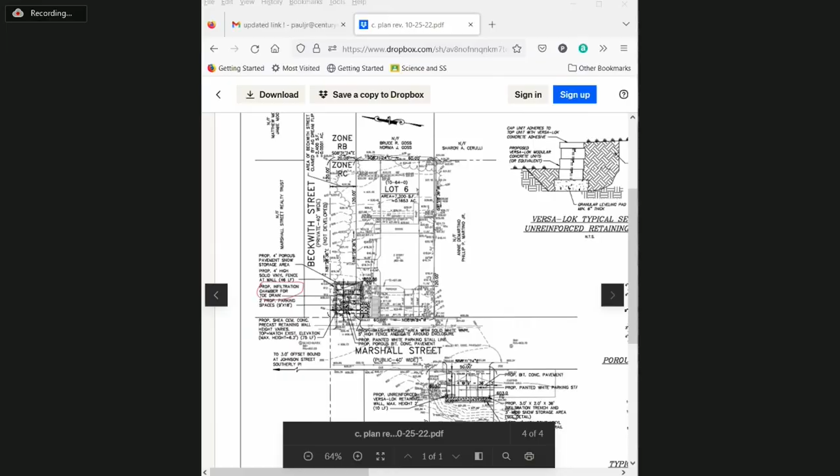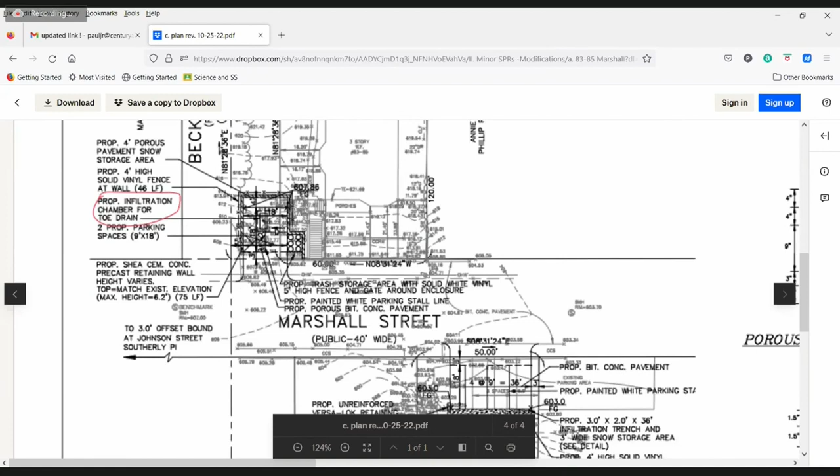These just arrived 2 hours ago. I sent them over to Nick for engineering and to O'Hara so he has them to post. Nick was concerned about where the water was going to flow, so he talked to the engineer, and the engineer came up with these plans. I haven't reviewed them 100%, but I know he said it should be all set with what Nick wanted. I'm not sure if Nick had a chance to review it. He's been very helpful, and he's given me many chances, and hopefully this can make this work. He's here somewhere, I think I saw him around. Did he? Oh, maybe he left. But anyway, I think he'll be on eventually if he's not here right now.

Can you zoom in a little bit? Yes, just a little bit. What do you want to see? The problem is it keeps getting cut off. From what I was able to tell when I received this, I think the only thing from the most previous version we saw Friday morning, Paul and Paula, was that circled on the left-hand side, proposed infiltration chamber for a toe drain. And I think that was at Nick Erickson's suggestion.

That is correct. In the area we're looking at right now is for 2 parking spaces, 18 foot width. That is correct, that's for 2. And then there's 4 on the opposite side of the street. Yep. So 2 spaces on 8385, and 4 spaces on 0 Marshall.

I would assume Nick's going to call in, he usually does, but I don't see him on there. You want to scroll down a hair to see the other 4.

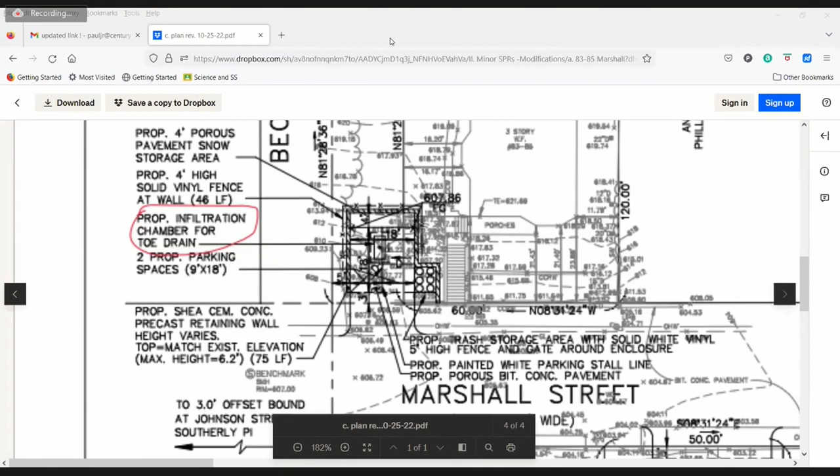Yeah, so pretty much after our meeting on Friday, I went to his office. We went over every note. The only thing that was concerning to him was trying to find out where the water accumulation on the 2 parking spots was going to go, because he didn't want it to go to the street, and we agree with that. So I put him in a 3-way with the engineer, and they went back and forth and figured out this infiltration system that's going to go in the middle of the parking lot of the 2 spots. It's going to be a pipe going around the entire parking lot, which is going to lead to the middle, and I think he has a sketch of what he has in mind on the print about midway on the right-hand side.

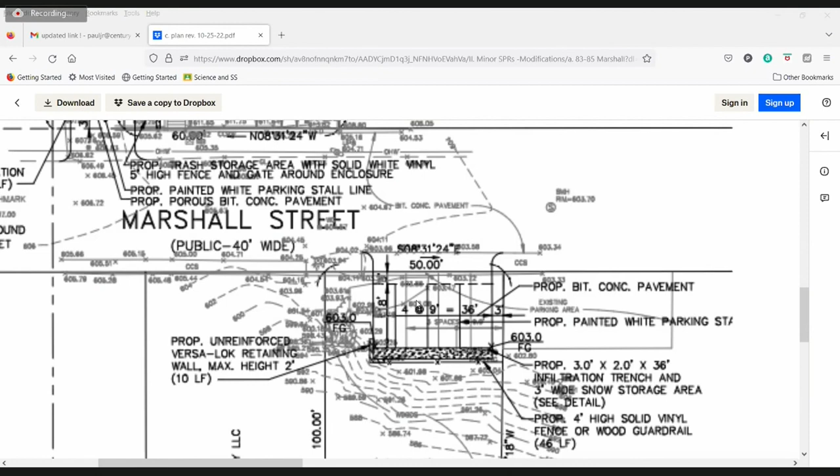Perfect. Well, since you met with him, it sounds like this has come a long way since we talked 6 months ago, or however long it was, with your partner there.

You've made leaps and bounds from before, so I very much appreciate it. Since Nick isn't on, and it sounds like you guys are in agreement, we can make it subject to final review from DPW, just to make sure his concerns are satisfied.

Let's look up the ZBA determination. Just bear with me one second, everything needs to be on the plan. I think this is the right one. Yep, this is the one you were talking about. Okay, so this was the ZBA decision.

They had some conditions in their continuance. You were saying you're going to them at some point after this, November 15th, I think our next meeting. One of their requirements was for us to have an okay on the planning before we move on. I just wanted to make sure these items were considered.

So we can go through that. One, trash spaces to be a line item on the plan, which we do see on the 83 to 85, you have it fenced in. Yep, correct, with vinyl fencing. Which is number 3, trash enclosed. Vinyl fencing, no chain link with slats and location shown on plan.

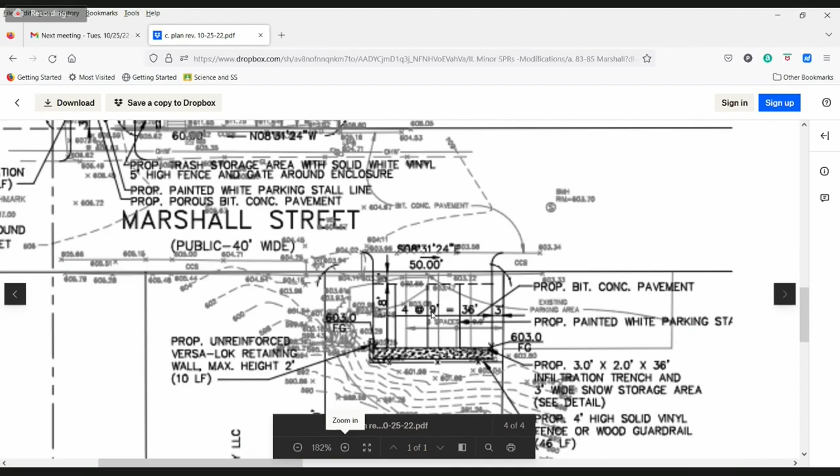You have it listed as vinyl or the wooden guardrail, you might do both. Correct. Submit a plan for Lot 6 for snow removal. Which one is Lot 6? Across the street, where the house is. Actually it's lot 69, I think, but I don't know why they're calling it lot 6.

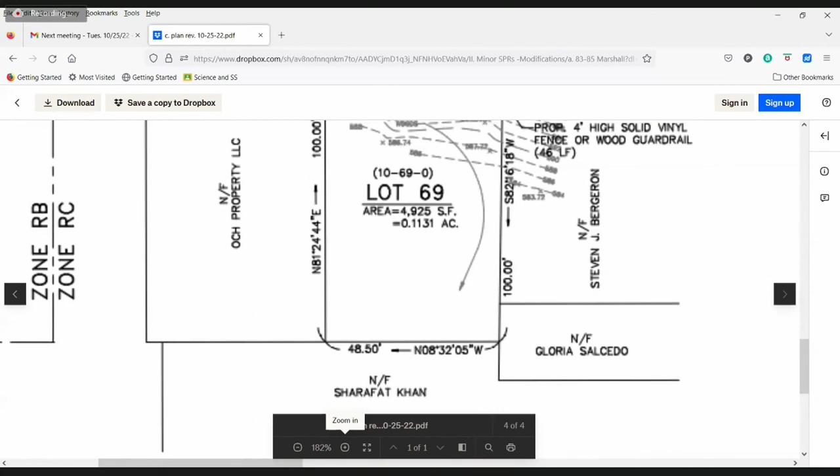And you have snow storage on there, and show the 6 spaces, it's supposed to be 83, 85, or whatever. Marked as emergency parking and garbage, Lot 6. So there is a total of 6 spaces between the two. Oh, that's supposed to say lot 69. So there's not going to be 6 spaces on Lot 69, there's 4, and then 2 across the street.

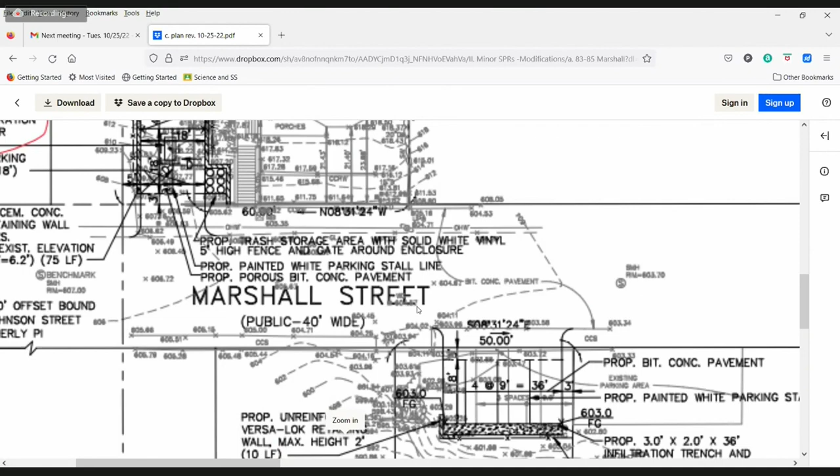I think it shows 1.5 per apartment, but it's okay to have an extra one. As long as there's no confusion, I don't know why the ZBA... obviously we'll approve this, hopefully that doesn't hold you up. You just tell the ZBA, this is what the planning board approved. Do any board members have any questions on this plan? No.

What was it, there is lot 6. They said lot 69 is this parking lot, and then lot 6, but what were they referring to? Oh, lot 6 is the house lot. Okay, thanks, Laura.

So, lot 6 for snow removal, and have lot 6 as emergency parking and garage. I guess you'll have to talk to the ZBA about that. I think we've worked with you enough on this, the planning board's comfortable. I'm comfortable with the plan the way you drew it up, and you'll have to discuss that with them, Nadal. You'll just have to know one of their conditions was show 6 spaces at 69 Marshall, which I think they meant lot 69 across the street. You don't have 6, you have 4. And then lot 6, which is the house lot, show it as emergency parking and garbage, which we're not necessarily doing, making 2 spaces there.

So you're just going to have to describe the situation to them. Yeah, I will. This was the approved plan, and hopefully they don't require you to change it. Yeah, I hope so as well.

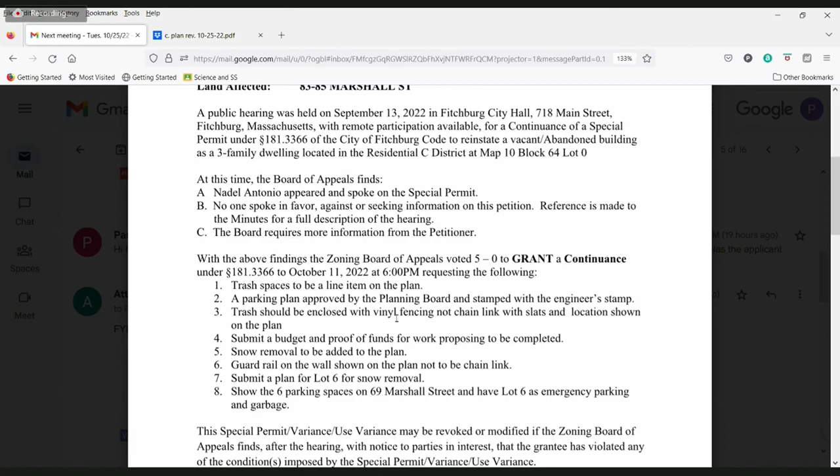All right, beautiful. Any further questions from any board members? Okay, is there any motion? I usually print out an agenda, and I don't have it, and there wasn't one in the Dropbox. This isn't a public hearing, right? No, correct, so I don't need to close it, it's just a minor site plan.

Okay, make a motion to approve 83, 85 Marshall Street, subject to the most recent plan dated October 25th, '22, with the caveat that it's subject to final review from DPW regarding drainage.

Second? Motion's made with a second. All those in favor say aye, all those opposed say opposed, and we'll take roll call. Alin? Aye. Laura? Aye. Alex? Aye. Paul? Aye. Paula? Aye. Amanda? Aye. Great.

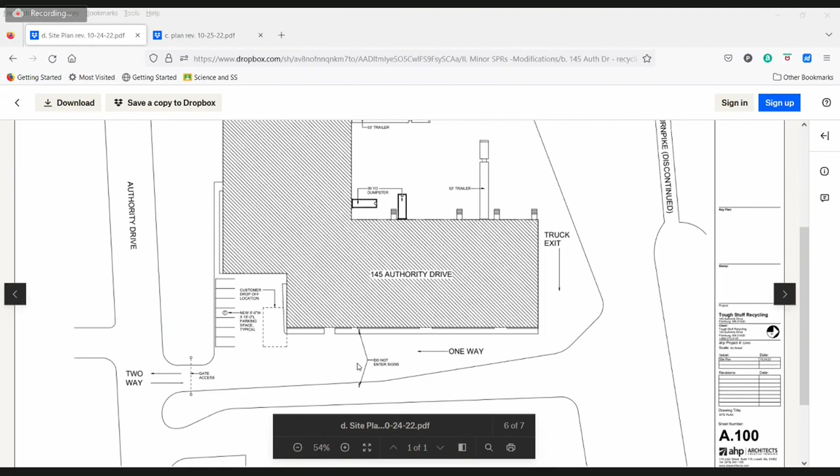We also have a customer drop-off zone. We've changed where our parking is, on the front versus on the east side versus the west side, to allow a little bit more parking area. Plus we've denoted the actual size of the parking — I believe it's 9 by 18, yep. So that was pretty much the extent of our plan.

In the notes, our security camera locations are to be determined. We're currently working with the PD and a private contractor right now to determine placement of that, and to hopefully minimize any illegal drop-offs at our property once everybody finds out who we are and what we do. Perfect, and I'm glad you put the gates on there too, for if and when you decide to do that, it's on the plan. We are deciding that — it's just, supply chain issues have hindered us, but everyone's having those issues these days, so.

For the general audience, do you want to explain the intent of the business? Oh yes, we are a mattress recycler is what we do. We came into Massachusetts because starting the first, mattresses are a landfill ban item along with some textiles and other things, and we came in to help the surge of mattresses that will no longer be able to be landfilled. That's pretty much our primary business. We take those, pull off all the recycled components, up to 75 to 85% of the mattress, and recycle those into second and third party items — that's the intent of our business here.

So it's only mattresses that you do, nothing else? Only mattresses here, yes, correct. We may expand further recycling operations here, but that's not in the plans currently. Currently it's just to take care of the major issue at hand, which is the mattresses.

And this is a little unique in that it may offer some of the residential drop-off at certain times. Yes, correct. Our business operating hours are from 7:30 in the morning till 3:30 in the afternoon, and the residential drop-off will be during those times — definitely not afterwards, but I'm sure we'll see that. But what we mostly do is work with municipalities in their current curbside collection. So most of the traffic we have in is truck traffic coming from aggregation points of municipalities, from trash collectors like waste management, and other large volume generators.

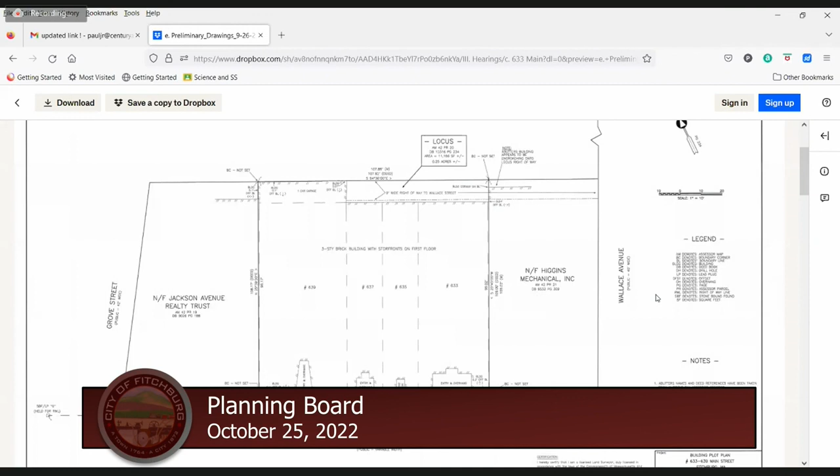So this is an existing 3-story building a couple blocks down the road. Right now the second and third floor are vacant, and the first floor is commercial - there's a dentist in there right now, and another tenant on the first floor. So the plans are to convert the second and third floor to residential apartments and maintain the commercial aspect on the first floor, with a mix of 14 two-bedroom and 2 one-bedroom units.

So that brings a total of? Total of 16. Right now the building has one means of egress off of those floors, and we'll be providing a second means towards the rear in the alleyway. There's a right-of-way to the rear of the building that we want to maintain for the second means of egress.

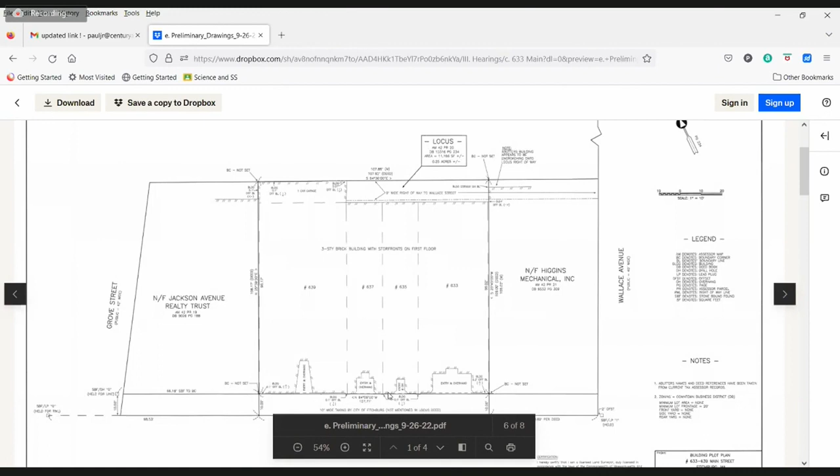And also trash collection - it does have a way out to the public road, so there'll be small wheeled dumpsters that will be rolled out to the road to be picked up for trash, won't be seen by the public, they'll be hidden. There was a comment made about that right-of-way area, because it's surrounded by buildings, wanting probably 2 security cameras back there. So we'll be providing whatever security is needed for the new tenants coming in, so they feel safe in that second means of egress.

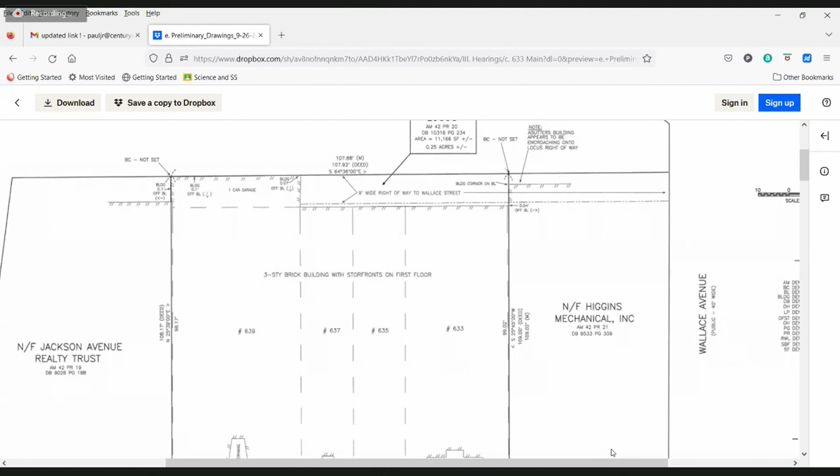The exterior of the building, the front along Main Street, we feel that it's adequate the way it is. It's been maintained over the years very well. Windows, everything's masonry. There might be a couple places that need to be patched here and there, but for the most part, it's in great shape.

The rear of the building also is in great shape, but we will be putting in new windows. The windows back there are ancient, so we'll have to replace them. Along the storefront, we're going to be painting the sign band above the windows and not changing out the storefront now. But over the years, as new tenants come in, we'll probably be changing out the storefront systems to something new.

What's the approximate size of the units? Of the residential units? The one-bedrooms are 600 square feet each, and the 2-bedrooms are 800 to 1,100 square feet. Half of the 2-bedrooms have 2 baths, nice open space.

And market rate at this point? Yes, market rate. And our understanding is there is an elevator shaft, but there's no elevator to be installed. We will not be using an elevator, that's correct.

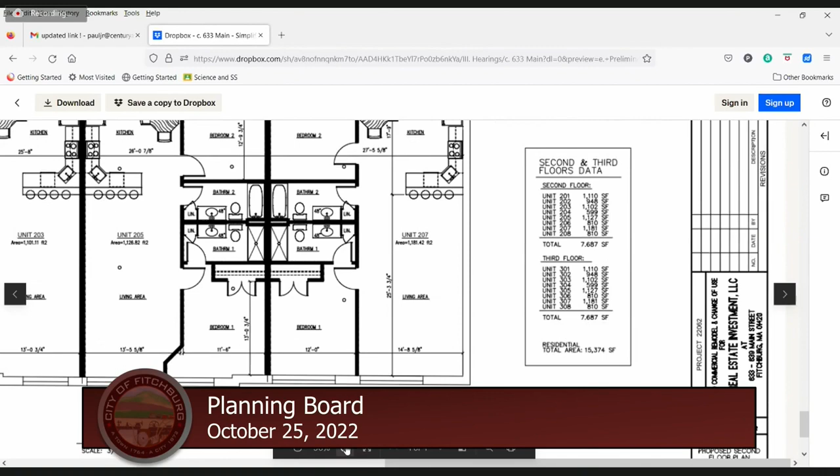On the floor plan, it shows the layout and the square footage of each unit. Yes, it's right here - lower right corner has that table. Those are all the sizes, Paul. So it's 15,000 square feet of residential units, give or take, and then those are the individual sizes. Correct.

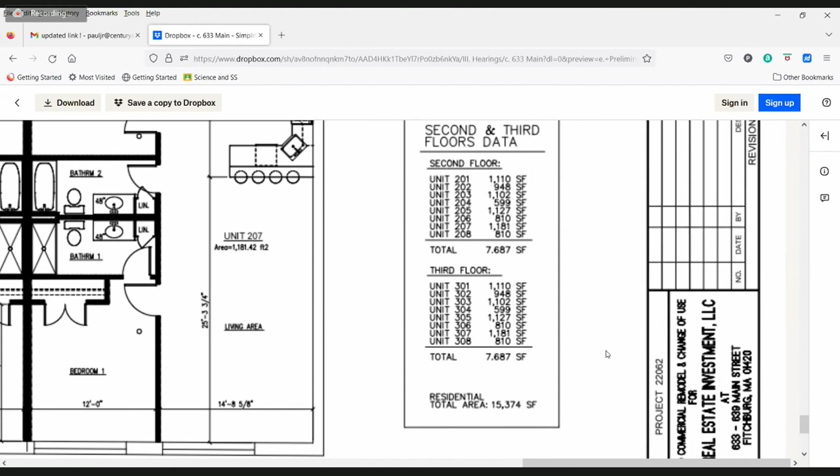Right, so at 2,500 per unit, that's 40,000.

The only other thing remaining is, we had talked about the rapid flashing beacon that the city's working on funding to install in front of the library as the crossing. We said the alternative is, if you don't want to get tied up in that installation itself, we would treat this like any other multifamily project - a $2,500 per unit contribution towards the fund, which we would then give to DPW to install that rapid flashing beacon.

Yeah, I believe that's the way we want to go, rather than the beacon installation. It makes it cleaner for you. I don't think that would cover it anyway, but either way, the city's got to pay for some portion of it.

Like I was telling Bill, this project in particular is going to be right where that's being installed. So it's perfect, especially if you use the parking garage. It's going to be a direct benefit for your tenants.

We can do it that way, and we'll just tell Commissioner Erickson that even if they pay for it now, we can reimburse the city or the DPW for those funds when and if occupancies get issued for these down the line.

Okay, Nick is on the meeting now, by the way. Perfect, Nick Erickson. I don't know if you're there, and you heard any of that conversation. Do you have any department comments? I'm here, can you hear me?

Yes, great. I've heard through community development that there's some extra money in the Main Street Boulder Drive two-way conversion project to fund that RRFB installation out in front of the library. So I'm hopeful that we can take advantage of that and get it done using those funds instead of having to make the applicant pay for this.

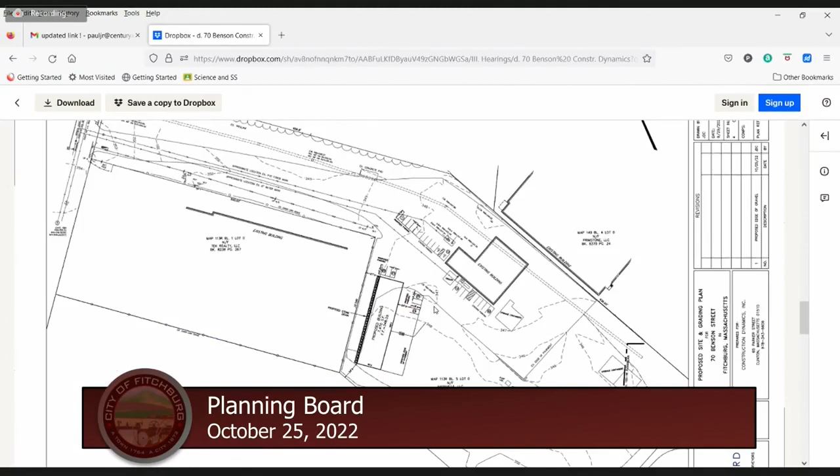So one of the comments that were made was about access around the building. Yes, so we revised the plan so that we have gravel access around the northwest side, coming all the way around. On the north side, it's already paved. It's going to be paved on the south and on the east, and we'll have gravel access around the west side. Is the width satisfactory to the fire department? It will be. That wasn't even a comment from the fire department with respect to the existing site plan we submitted, but with that gravel access going all the way around, I'm sure it's going to be fine.

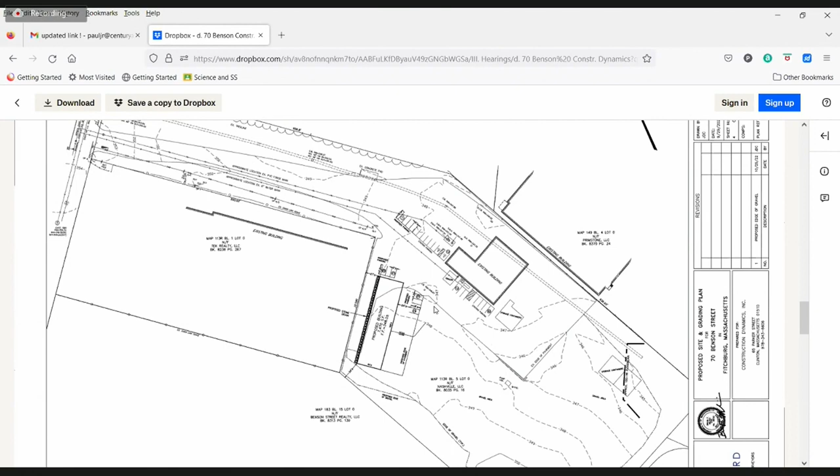We're fine with the conditional approval stating that the fire department must give its blessing for the access around the building. We're also seeking approval this evening so that Construction Dynamics can actually start the foundation in the good weather and get this project going.

And with that said, landscaping was brought up at the Friday morning meeting, and I would propose a condition that a landscape plan be submitted to the planning board for approval and the landscaping be completed prior to the occupancy permit being issued.

Another comment Friday morning was about a dumpster. There are 2 dumpsters on site already. If we need a third one, I'm sure we can come back and agree to a placement of the dumpster with the planning board. But there are 2 dumpsters on the northeast side already.

Clearly not visible from the road. And the abutting property is all industrial. In fact, this whole area is industrialized. And the landscaping, as you mentioned, would be mostly along the frontage.

Yeah, just the frontage, the existing landscape island. Whitman and Bingham, Haley Ward could have certainly thrown some bushes, shrubs, and trees on the plan, but I think what we're going to do is have either Andrew Leonard or Brandon Bro, two landscape architects we work with, come up with a plan that makes sense and submit that to the board for approval. That's what we would prefer to do. I think that's great, above and beyond.

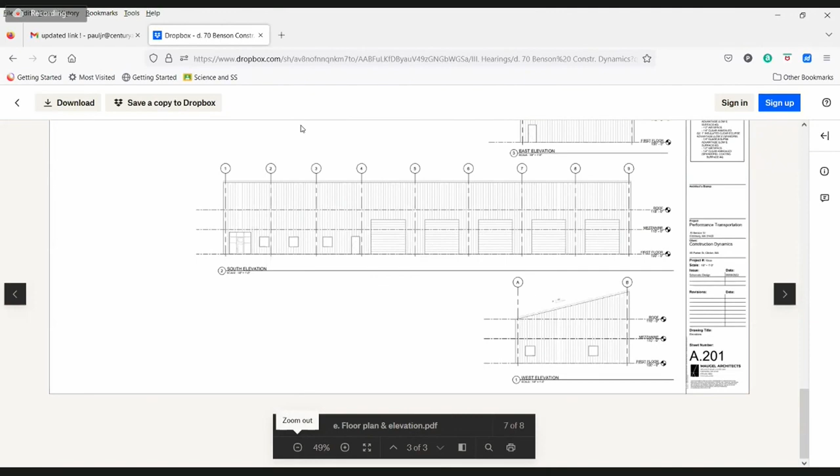That said, a conditional approval - any comments submitted by the DPW Engineering Department, we would like an opportunity to take care of those with them and give a copy of the revised plan to the board as well.

I know Jeff Hillman at DPW took a look at the plans today. He's on call as well, as is Nick.

If there's anyone from DPW who'd like to comment on this site plan before us this evening, Nick or Jeff, if you guys want to say anything.

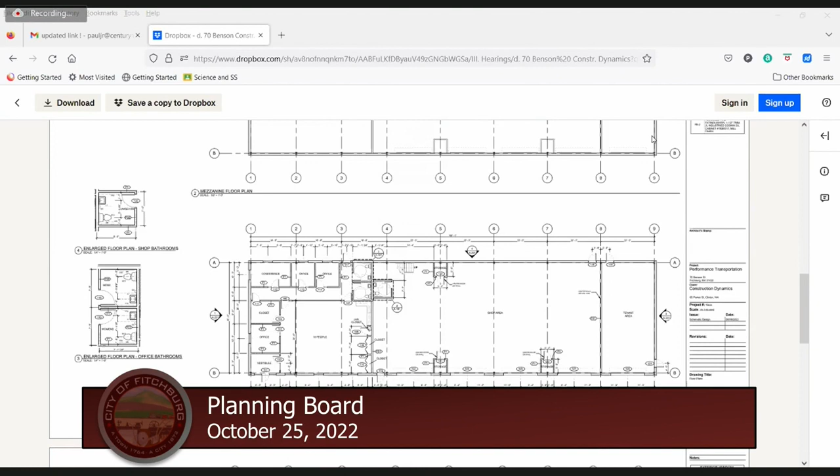The only other thing Jeff had during his review was the utility trenches, just making sure we've got the 12-inch cutbacks on either side. And I wanted to add the typical statements about utility permitting - any new water sewer connections need water sewer connection permits, and work done within the right-of-way needs to be done by a bonded contractor.

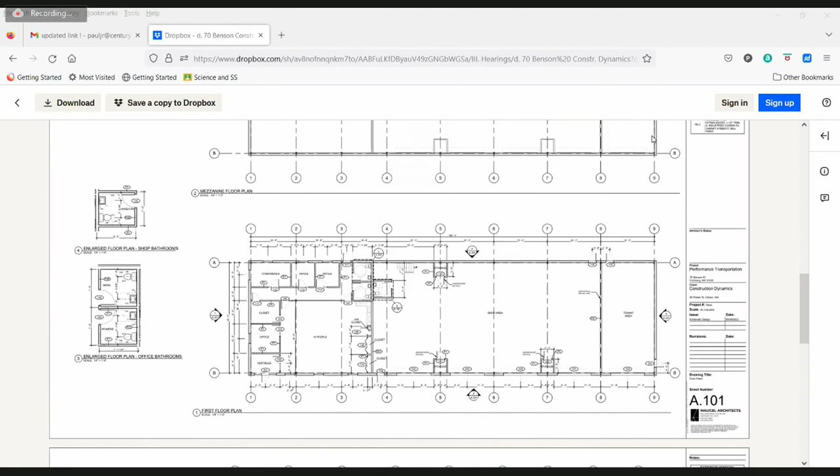All acceptable, pretty standard. Thank you, Jamie. Thank you, Nick.

This is a public hearing. Is there anybody else in the audience who would like to speak on this matter? This is a site plan for Construction Dynamics for a new 7,470 square foot light manufacturing building on Benson Street.

I had no one virtual. Mike, do we have any further comments from any departments? Just police said no objection.

Make a motion to close the public hearing. A motion's been made to close the hearing, with a second. All those in favor say aye. Aye. All those opposed?

I'll make a motion to approve the site plan for Construction Dynamics, a 7,470 square foot light manufacturing office building at 70 Benson Street, subject to satisfaction of Fitchburg Fire Department review of access around the building, landscape plan to be submitted and work completed before issuance of the occupancy permit as suggested by the applicant, and coordination with DPW regarding utility trenches, permitting, water and sewer connections, and working within the public way.

Second. Motion's been made with the second. All those in favor say aye. All those opposed say oppose, and we'll take a roll call.

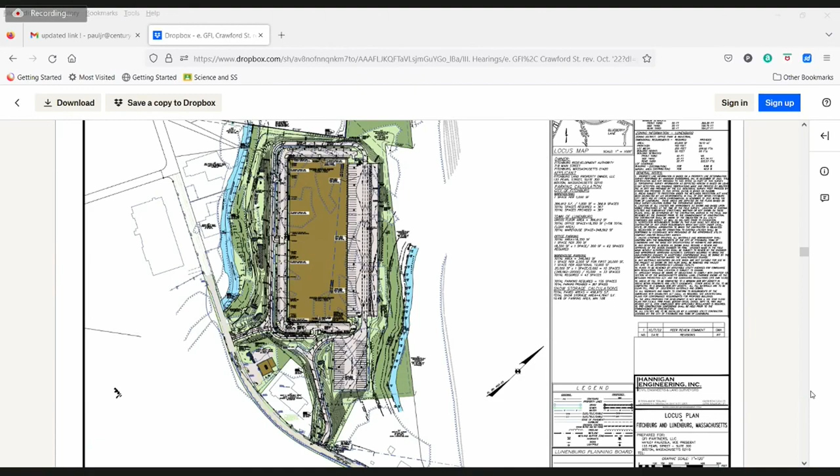Great, again Chris Anderson with Hannigan Engineering. Do you mind going to the next slide? This one? Okay, yeah, this one is fine.

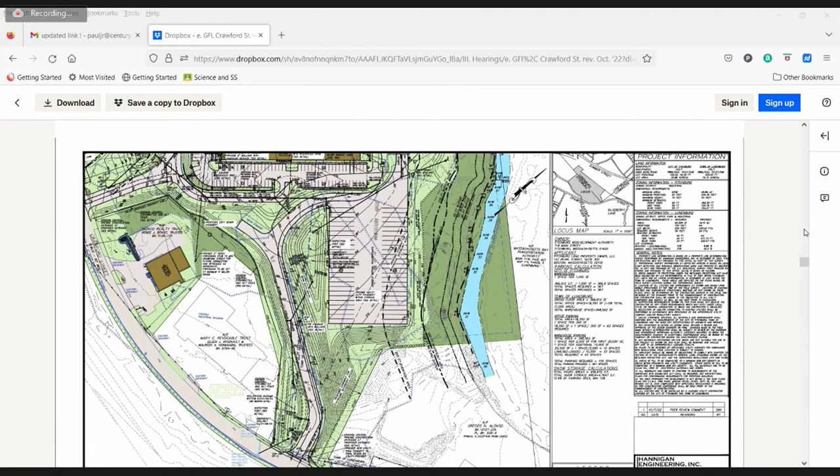So on this plan sheet, you see the truck entranceway along the easterly side of the property, as Haley just mentioned. This will be located exclusively for truck drivers and access to the rear loading areas. It'll be 30 feet wide for the traveled width. At the entranceway, there will be effectively a 3-lane driveway, 1 entry lane with 2 exit lanes, one making a left-hand turn, one doing a right-hand turn, to make sure a queue doesn't generate significantly on the property itself. There's a small infiltration basin near this entryway, which I'll go over in much more detail in a moment.

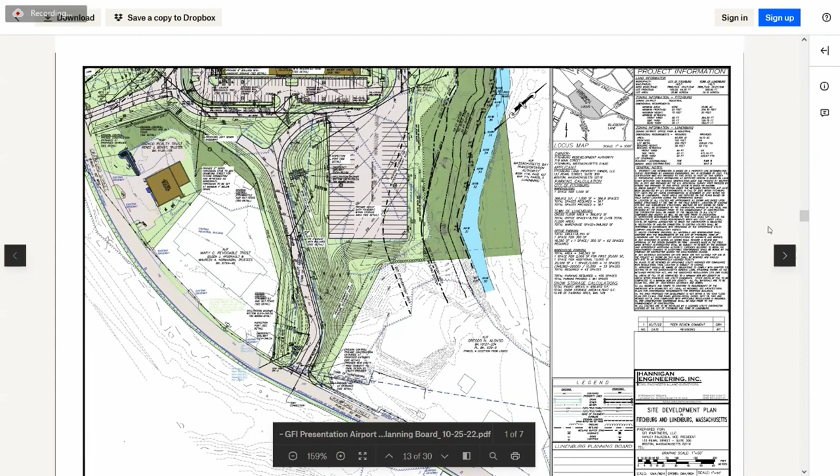Along the left-hand side of the page, we have the realigned employee entrance for the development. We shifted this driveway approximately 100 feet further to the south to allow for greater offset from the Nashua River, providing compliance with comments from the Conservation Commission, as well as to enhance the sightline profiles in this area.

This driveway will extend into the property and tie into an outer loop road that encompasses the entire property, providing access to the employee parking areas and creating a secondary ring around the outer perimeter of the building. It will also serve as emergency access to the truck loading area, or as an exit if something happens on the main truck road.

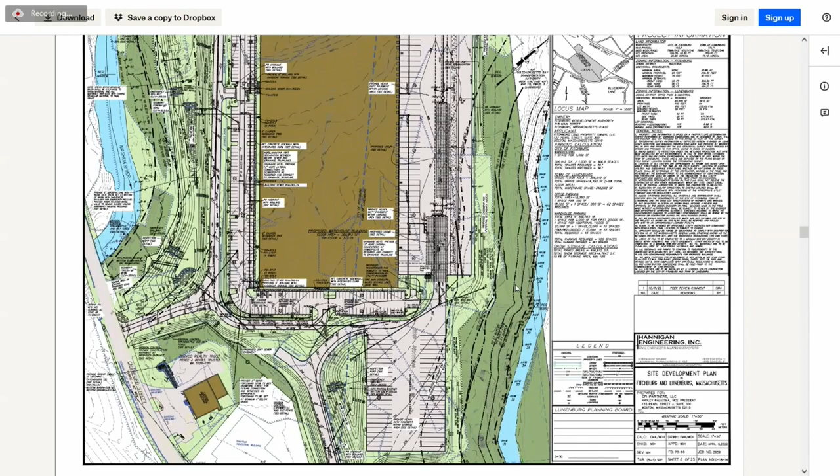If you go to the next page, we're traveling further north into the property, and the loop road configures a giant loop, tying back into the backside of the loading dock area.

As for utilities, we intend to tie into the municipal sewer and water system within Crawford and Airport Road. We'll provide fire sprinkler connections as well as domestic connections. This fire loop will encompass the entire building and provide access to several fire hydrants spaced throughout the property for fire suppression aiding capabilities.

Sewer will extend north into an existing sewer trunk line running through the abutting property, with the connection made within the City of Fitchburg's sewer easement. The property currently contains an old siphon sewer line, a unique way of transporting sewer water uphill—effectively moving a lot of water through a small pipe. That's a broad term for the hydraulic calculations, but that's what it is.

Due to the hypersensitive hydraulic nature of that line, we're proposing to extend our connection further upstream of that pipe in order to maintain flow and minimize impact on that line.

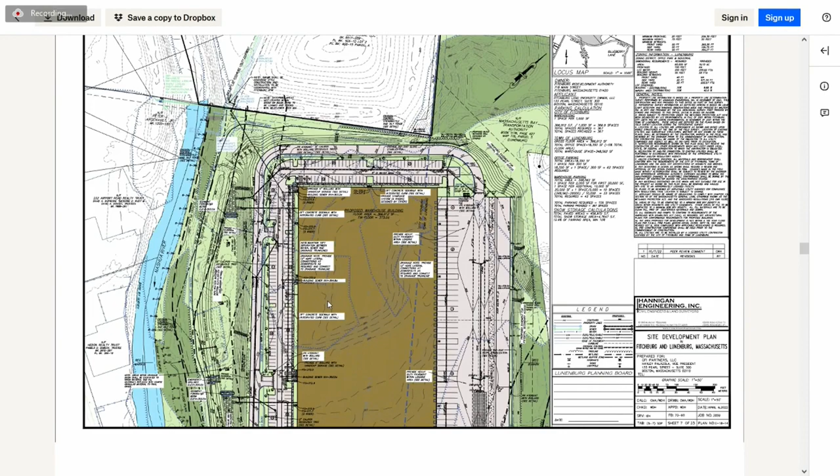Chris, I believe Hannigan responded to the stormwater review. Yes, there were a number of comments about revising or incorporating items into the O&M.

Yes, there were a couple comments relative to including additional measures within the stormwater basins, emergency relief valves, more inspection ports, stuff like that, so we've incorporated those into the plan. In addition, there was concern that we should also include some of the proprietary stormwater management features we're using for water quality treatment into the O&M plan, which have also been incorporated.

So are there any issues outside of the comments that were made for incorporating them? I don't foresee any comments coming from what they brought up.

Okay, those were DPW comments, or were those Tighe & Bond? Not DPW, those were Tighe & Bond. Okay, Tighe & Bond. And then the applicant responded to those comments.

I just want to make sure that we don't have any hiccups or anything. I'll just say subject to satisfaction of the Tighe & Bond comments. Yes. And there's no comments that you took issue with, right?

There was one comment relative to mitigation and calculations we've utilized in the past with the city and this board.

So let me say this, because I won't probably understand what you're going to say. With satisfaction of mitigation of the Tighe & Bond comments, the one issue you have, I would say, to be verified with the DPW to their satisfaction. Because as long as our DPW is satisfied, then I have no issue with it, especially when it comes to stormwater, water sewer connections. All of that is neither here nor there for.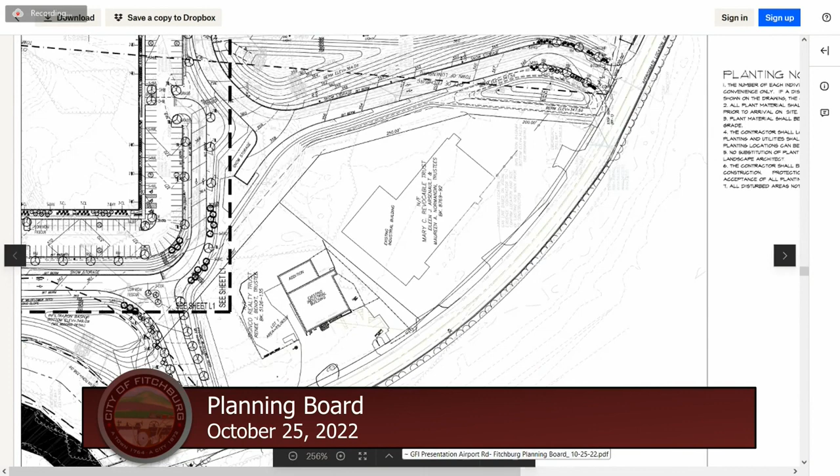I'll add that if there are further questions on the landscaping plans that we can't answer, which we probably can, I can get my landscape architect to provide a memo if needed. He tried to use native plantings on the site, and there's a planting schedule. It totals approximately 100 deciduous and evergreen trees being planted, and just under 400 different shrubs and grasses along the property. That was filed in addition to Chris's plan set, so I apologize for any confusion.

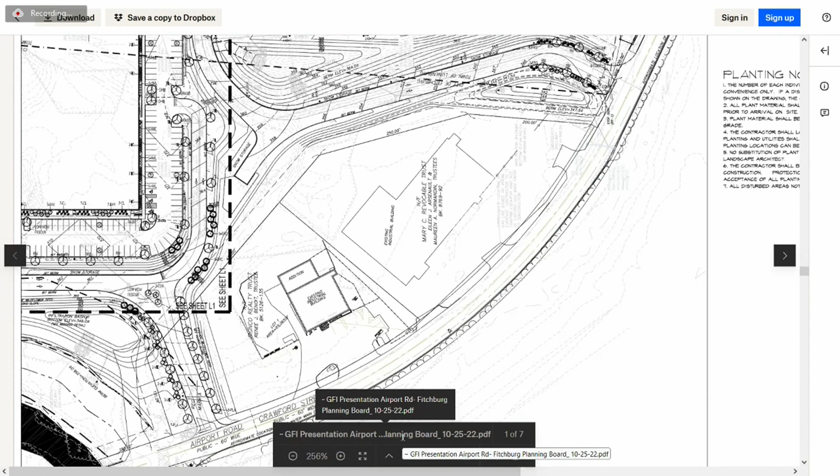It's also making sure that nothing impedes sight distance when you're getting to the actual entrances, so they're lower enough at that location.

Signage - is that established on the entranceways you'll have? At this point, not yet. When it does, we'll make sure it complies with the zoning ordinance. Once you determine the sign location, just show it on the plan and resubmit it. I know it's a last minute thing, especially since it will probably be determined by who the tenant ends up being, so we can see where it's going to be on the site plan. Before you install it, give us an elevation drawing so we know what it looks like, how big and wide it is - proposed marquee.

This is probably just a general question, but trash - I'm sure with a warehouse this size you have a plan for that. Is it all interior? There are several exterior dumpsters in the truck loading area. That will be enclosed with a vinyl fence, so it's not viewed by whoever drives through the site, and the site is extensively located far away from the right-of-way with significant elevation relief.

Just out of curiosity, are they shown on the plan? Yeah, oh yeah, right here - there's an enclosed dumpster on both pad sides, typical of these kinds of uses. There'll also be a dumpster somewhere inside the building for boxes and other stuff.

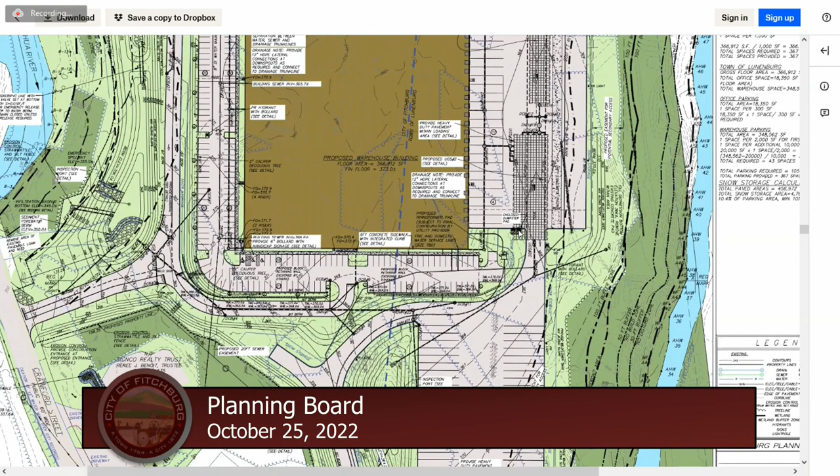Can you describe any energy controls, savings, solar, or anything planned for the building? Sure, I can speak to that. We construct all of our buildings to be solar ready, and before construction we'll look at the feasibility of installing solar. We have solar on multiple buildings in our portfolio, so that's always something we consider. We use air source heat pumps in the office space to reduce greenhouse gas emissions, along with LED lighting fixtures throughout. We have a couple of projects under MEPA's jurisdiction right now, working with DOER on some of them, and we've implemented these things in our projects and will continue to do so.

Exterior lighting, I'm sure, is probably proposed all the way around the building. Yeah, there was a photometric plan submitted during the original submittal process, and the general intent has remained the same - night compliant light fixtures, no light shine beyond the property lines, and adequate lighting in or around the site to make sure people get around the property safely. A formal lighting plan will be developed prior to construction when the actual units are ultimately determined. And with 61 bays idling, any policy on that?

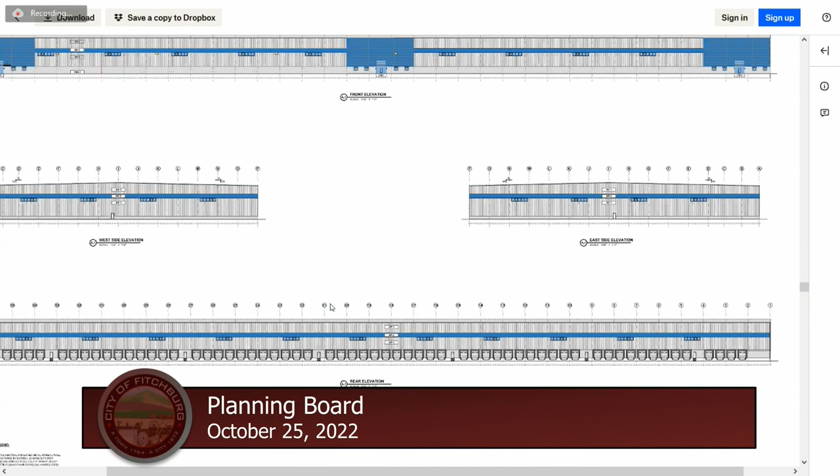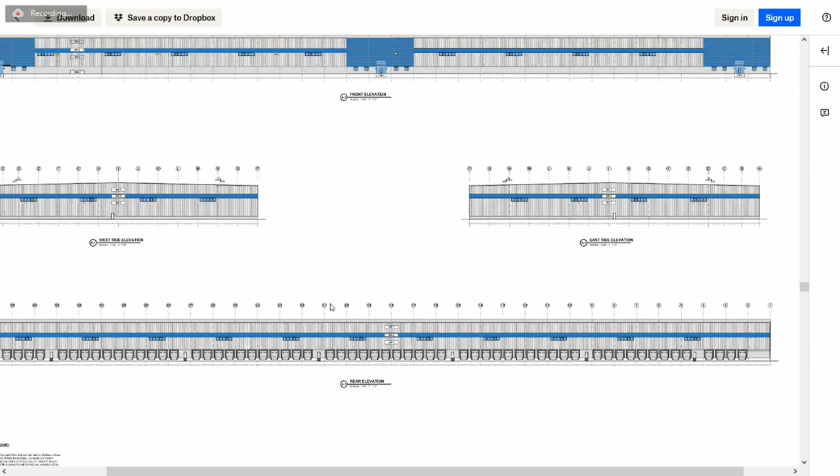What's that? Red and gray would be fantastic. Red and gray, Fitchburg colors? All right, I'll throw it in there. Halfway around the building on the Lunenburg side, you know? No, you wouldn't have to. Let them see the red and gray. I said you're really getting too consistent, so he threw some blue panels on the entranceways. That was his way of changing it up. So we can look at that.

It's not a condition. If it's something you want to do, great. I would just say, as long as it's not all one color. Got it, you just want to break it up visually. Understood, yes, just not a monolith.

And then there's a floor plan in there too, which shows 3 proposed office spaces. As I mentioned, in case this was subdivided, we could accommodate multiple users. The bay spacing is approximately 50 feet by 56 feet wide, with a speed bay on the end there at the end of the loading docks. This is pretty typical for Class A warehouse users. So you can continue on.

As I mentioned, Vanasse, our traffic engineer, is on the phone, Andy Arsenault, and will be presenting a couple of slides regarding traffic. We know that's an important topic we didn't cover at the last meeting. Since then, we filed a full transportation impact assessment to the city of Fitchburg, sent a copy to the town of Lunenburg, and performed an additional study for the city of Leominster to satisfy their concerns about traffic going through Leominster. So Andy, I'll turn it over to you if you're ready. Sure.

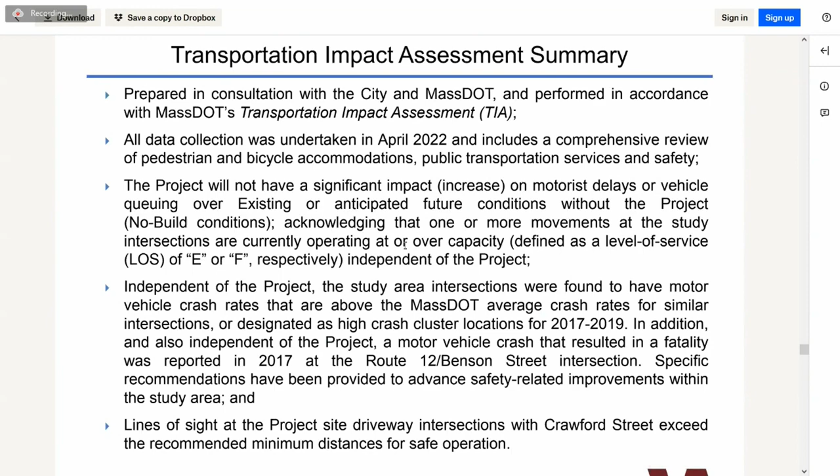Based on our review of the available crash records from the state, we did find some high crash locations, for which we've suggested some improvements that I'll get into in a moment. And lastly, the lines of sight at the site driveways exceed the recommended distances for safe operations. Next slide, please.

As far as the project specifically, we used data compiled by the Institute of Transportation Engineers, which is the industry standard, to estimate the traffic volumes for the project. This data is based on real-world studies of similar land uses across the U.S. In short, the project is expected to generate around 620 total trips over the course of a typical weekday.

I don't want to go too far down on the technical end, but the project itself is expected to generate around 620 trips over a typical weekday, with around 70 trips during the weekday morning and evening commuter rush hours.

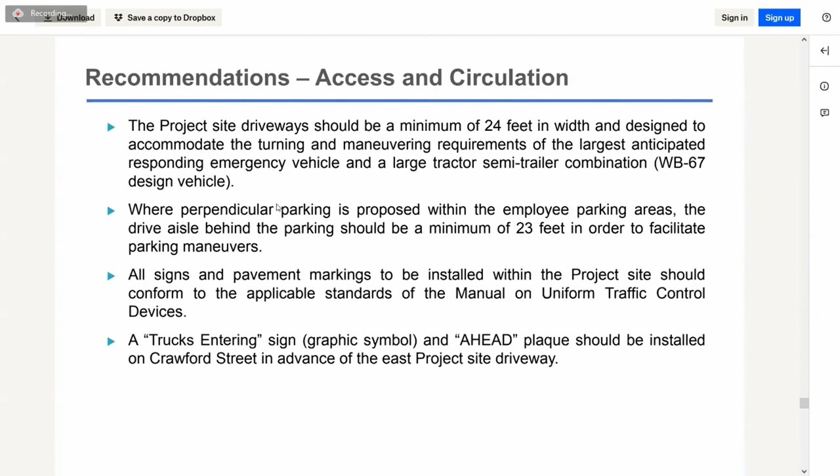We've also looked into breaking down the split between the passenger cars and the trucks, which is about a 2-to-1 split over the course of the day. Does that include both truck traffic and employee vehicles? The 620, yes, it includes both. I think it was around 400 employee or passenger cars, and then diesel trucks around 200.

After performing that technical analysis, we came to our findings and our recommendations. This first one is an abbreviated list of the recommendations we included in our study, and they have generally all been reflected on the site plans. These are all fairly typical of these types of projects, and they just aim to ensure that safe and efficient operations can be provided in and around the site.

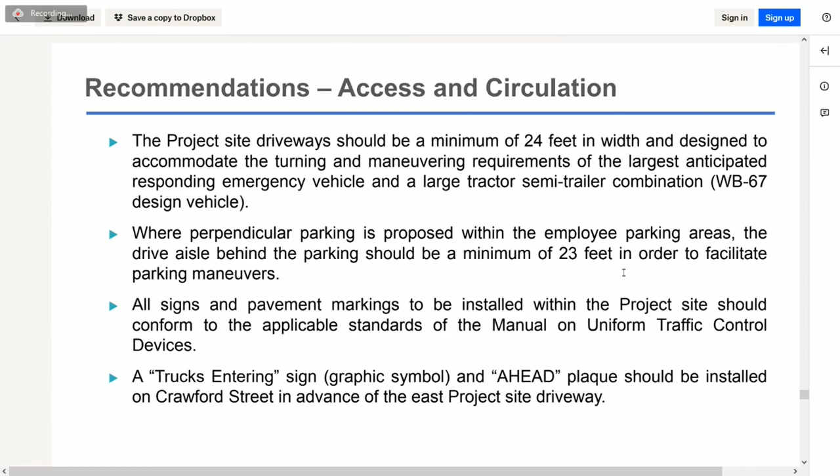The one item I do want to point out that is specific to this one is the installation of a truck entering sign in advance of that east site driveway, just to let motorists coming along Crawford Street be aware that there are trucks coming in and out. Next slide, please.

Moving away from our site, we have a few different recommendations, basically two families of recommendations focusing on traffic operations and safety enhancements. I'll touch on the operations first.

Right off the bat, we would recommend the design and implementation of traffic signal timing and phasing improvements at two intersections: Route 12 at Bemis Road and Wanoosnoc Road, and Route 12 at Nichols Street and Battles Street, just over that line in Leominster. Additionally, we suggested that some design alternatives be developed at the Route 12 at Abbot Avenue intersection, including but not limited to the installation of a signal. We'd provide that functional design report to the city for its future use.

Next slide, please. Well, before you move that slide, what about the intersection, any light optimization regarding Airport Road and Bemis intersection?

I could take a look at that one in detail. I don't believe that we found that there was any significant impacts at that intersection.

Bear with me, my computer is... Okay. Are you proposing that all the traffic is going to be going up Benson Street, or going over to that intersection and up Wanoosnoc?

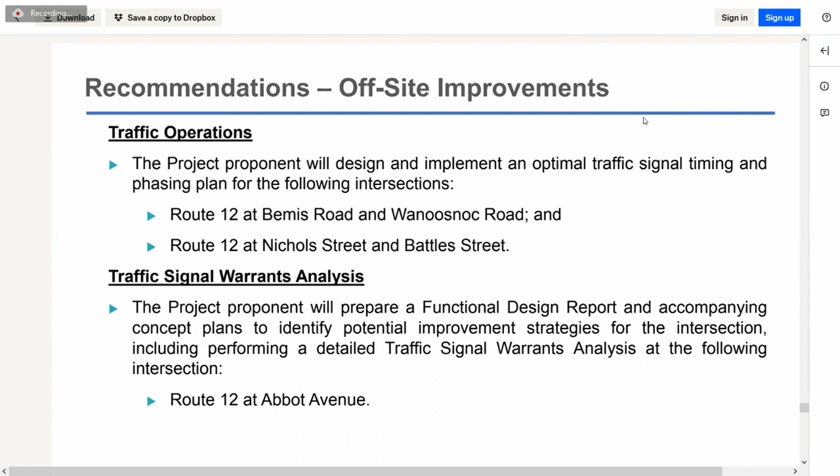Yeah, so I just wanted to ask, whether or not there should be any updates, since that's right at the end of Airport Road or Crawford Street in this instance, whether or not there's any pertinent updates that might be needed for that timing.

I didn't find any in my initial review, but it's something that we can definitely look at getting into, not to spoil anything, the road safety audits. We can certainly look at Airport and Bemis, which only becomes something we have to look further at once Amazon's up and running. The combination of this site and Amazon could cause issues at that intersection.

Yeah, Airport and Bemis. I don't know, I mean I drive that almost daily. It's not an awesome intersection, but there's no... They're going to look into it.

Yeah, right. Well, what I was going to say was similar to what we did with Amazon. The conversation needs to be, you know, look and see how it does, and then see if in the future we need to address signal timing, or additional turning lanes, or I don't even know what's possible. But it's the type of thing where I don't think we'll know until 18 months or so from now, when ideally both businesses are operational.

So I would say we can still look into it now, but we would also be looking at some future condition, as was brought up by the peer review, of monitoring, going back over and reviewing the traffic. We've been doing this a lot in our other projects, committing to a monitoring period 12 months or 6 months after the project.

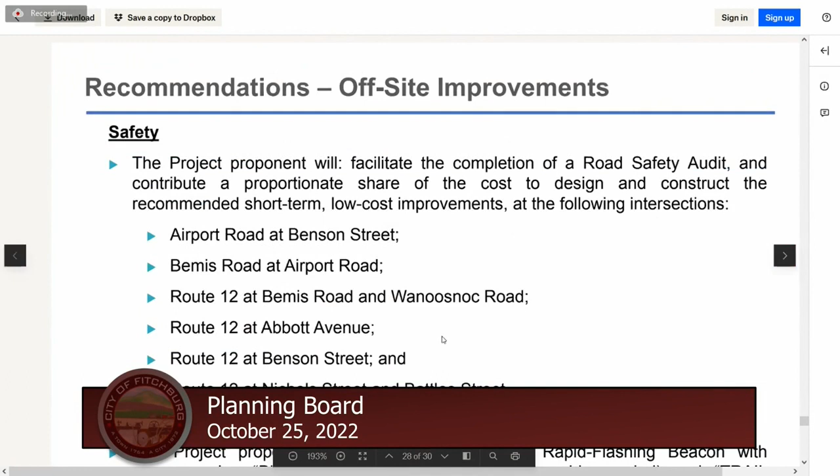Talking about the other end of it, the safety aspects. As I mentioned, we noticed some areas for improvement within the study area. We recommend that a road safety audit get created for the 6 study area intersections and then turned over to the city for their future use.

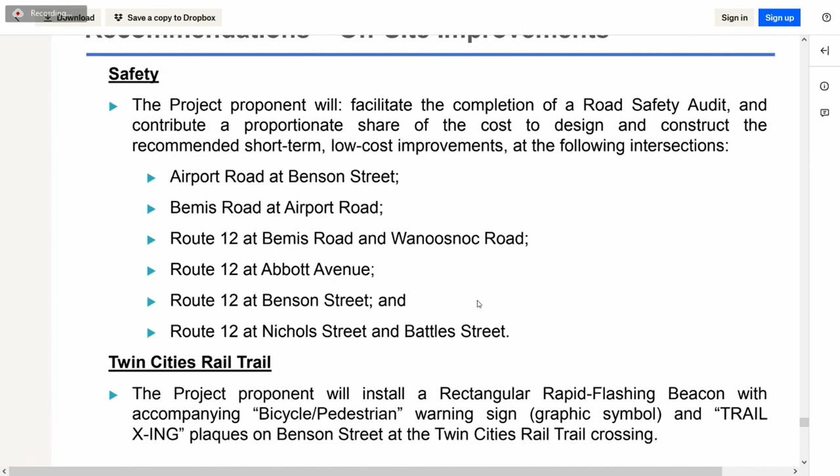In addition, the proponent will commit some funding to implement some of the low-cost, short-term improvements, hopefully in advance of the more sweeping changes, so there can be some improvements made at those intersections, kind of phase 1. And the last one I want to call out for safety is the installation of an RRFB down at the Benson Street crossing of the Twin Cities Rail Trail crossing.

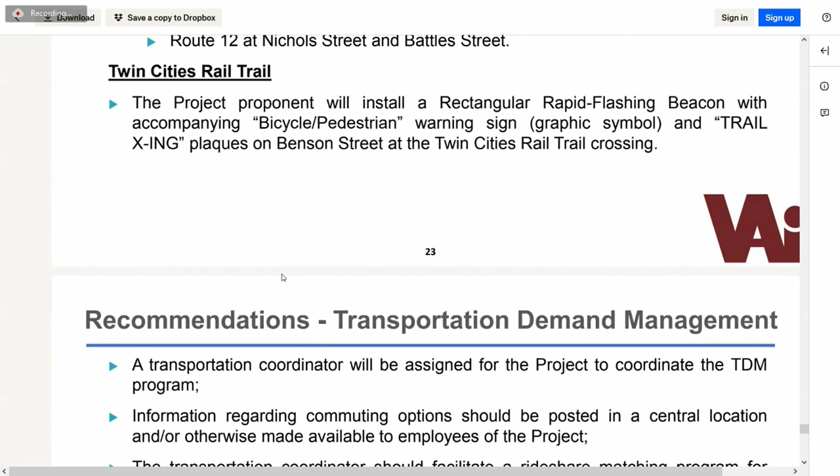Yes, I agree with that, but I think we also need those rapid flashing beacons at the Bemis-Wanoosnoc intersection. That's actually an even larger intersection than the Benson Street intersection. Okay, so I was under the impression that was the location we were talking about. I don't even think Benson was an issue. Bemis is the issue, the one that's been or could be an issue, is that principal intersection, the crossing at Wanoosnoc and Bemis, because of how close the rail trail is, turning that intersection.

So I was under the impression, from my notes when we had development review, probably back in March, that the chief had said to install a flashing beacon there. I was under the impression we were talking about that intersection. It's fine if you want to do both, but I think Paul is right, the problem intersection is Wanoosnoc and Bemis. It's at the crosswalk itself. Benson is mid-block, really, but Bemis and Wanoosnoc is right at the intersection.

Yeah, the way I think that would be facing the proponent side, meaning if you're coming up the hill on Bemis, you'd see the flashing to stop, not necessarily around that corner from Water Street because it's right there. I don't know, I see what you mean, yeah.

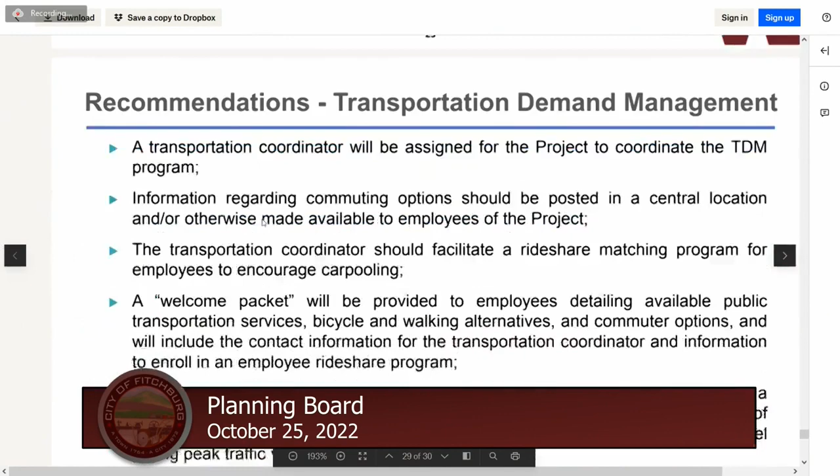And lastly, just to round things out, we recommended the inclusion of a TDM program for the project, just to help cut back on single occupant vehicle trips for the daily employees as much as practical. There's only so much we can do for the trucks, obviously, but these are just a highlight of some of these, taken directly from our report.

Just the hiring of a transportation coordinator to manage the program, setting up and facilitating a rideshare matching program for the employees, and the fourth bullet there, a welcome packet detailing available transportation services, bicycle and walking alternatives.

I don't know that there are any walking alternatives, you can't really walk up Airport Road. So there's no sidewalks anywhere on Airport Road. So I would not encourage anyone to walk on Airport Road. It's a very high rate of speed that people travel at, and I would imagine FPD would say the same thing. I saw Captain LeMay's on here, I don't know if he's here for this project, but especially if you have a late shift worker, we don't want people walking on Airport Road, so I would expressly discourage that.

Yeah, I would encourage, though, communicating with MART regarding busing, because depending on the employees interested, they could even potentially have a stop there. It's definitely something that comes up when tenants commit to a site, they want to know what's available to their employees as well, so I can certainly see that. Perfect.

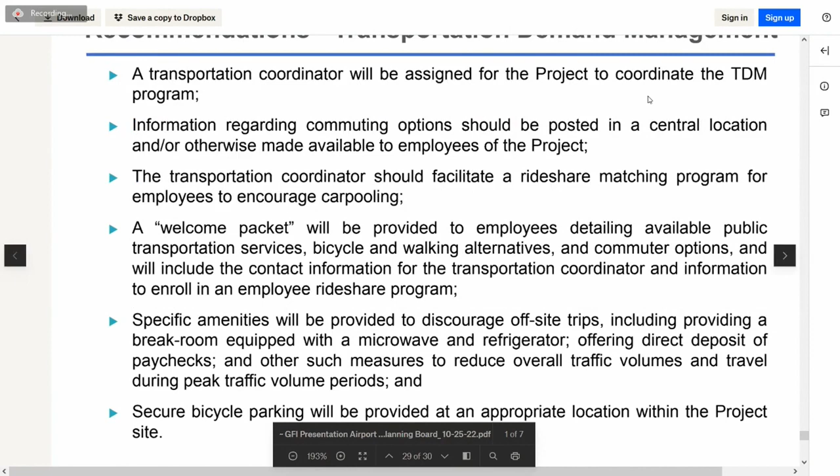In the review, I did notice a lot, on the condition side, that a lot of them are going to be performed before the certificate of occupancy, just saying, for some of these accommodations to be done. And did you see anything else off-site?

I know this was brought up in April, but at least painting of the bridge rails over the Nashua, that's up by the west entrance. Something minimal, but something that'll bring up the aesthetic. I'm sorry, I forgot to include that. That's okay, it's an off-site piece, but it's really right before your main vehicle entrance, so it kind of behooves you in order to spruce it up a bit.

And then I would just even ask DPW whether or not there's any accommodation potential for pavement improvement on the Airport Road side towards Benson Street, because the other side going towards Leominster has been repaved, but that section has not, so with all the truck and vehicle traffic proposed.

So Paula, the issue there is that we need to replace the water main from Bemis Road, essentially to that building right before the bridge. So I had applied for an ARPA grant to take care of that and then pave the road after the work was done with our last round of ARPA funding. The steering committee chose not to fund it, so it has sat idle for a little while, but it's on our radar of things that need to be done in the very short term, because we recognize the pavement is terrible and it needs to be paved, but in order to pave it, we need to fix the water main. So we're hoping to pursue ARPA funding when they open up the second round of funding this coming January.

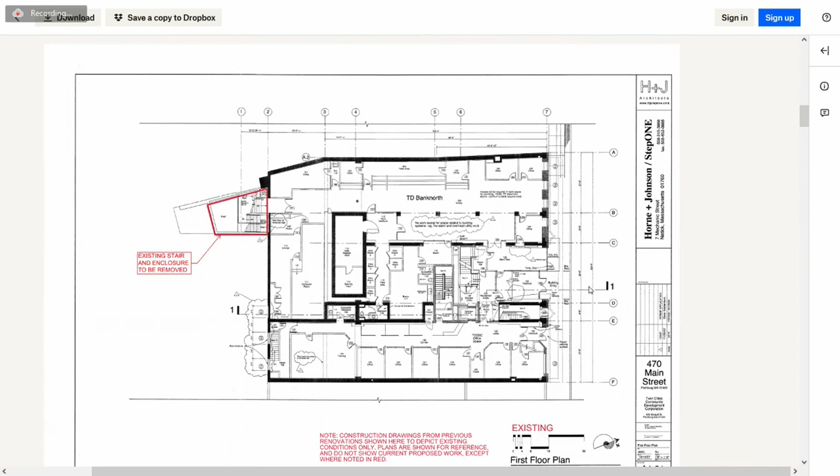The Main Street commercial space where TD Bank was before they left will become a new commercial space, and we'll have a second smaller commercial space on the Main Street side as well. So our total commercial space will go down from 13,000 square feet to about 5,000 square feet. We'll have new residential units in the back, and the 2 commercial spaces in the front will be much easier for us to meet the market demands.

So that's really the overview. I can turn it over to Andreas to give you the specifics about what the proposal is going to be and answer any questions that you might have.

Hey Mark, you mentioned overall - is it currently 38 units? No, it's currently 31 units, so we'll be adding the 7 units in the back.

It's on 2 different levels. So I think you have it up there, Paul - that's the first floor. And then if you go back the other way, you would see the lower level. Yep, oh boy, okay, thank you.

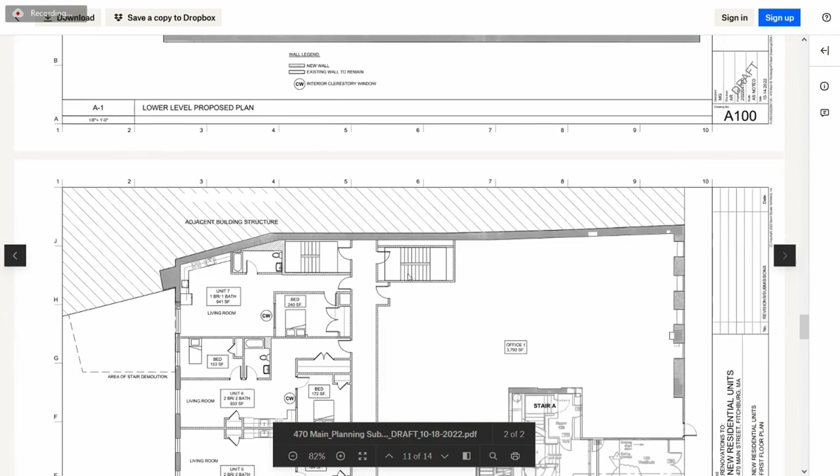I won't spend much time at all on a description of the existing building. I don't know if you're familiar with it, but feel free to ask any questions if you have any. And I think probably the plan you were on is a good one to start with. It's page 10 of the set, if you'll just scroll down.

This is the proposed lower level of the building. The work we're proposing is on the first floor and on the lower level. The first floor is at grade at Main Street, and the lower level is kind of a split level setup - it's at grade at the rear of the building on Boulder Drive. The units we're proposing at the lower level, at the back of the building, will add a total of 3 units. You can see them here - at the bottom of the plan south, there's a 2-bedroom, and then there are 2 one-bedroom units adjacent to those.

The existing entries to the building are going to stay as is. In this plan, you'll see on the left-hand side there's a double door - that's the rear access to the building. That accesses a common corridor that serves the existing residential units on the upper floors, also serves as trash and maintenance access for the building. And I understand it's the entrance that's used quite a bit by a lot of the residences on the upper floors.

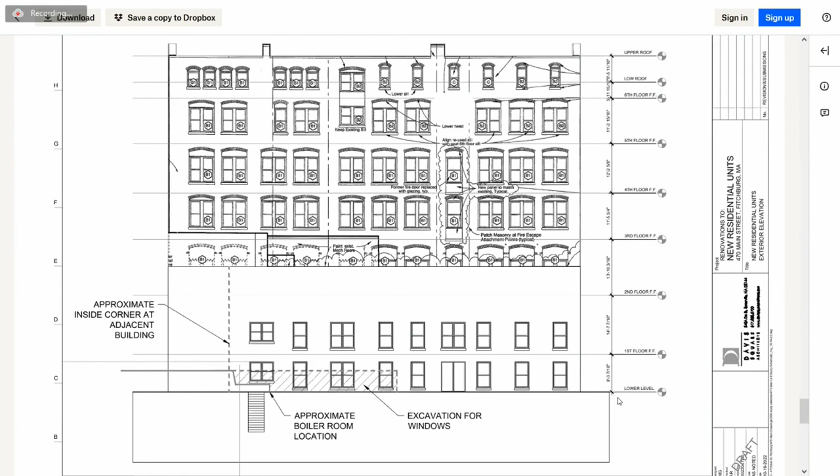At the left-hand side, you'll see there's a dashed-in area where there's an existing stair tower that we'll remove. That stair tower currently serves as access to the commercial space, which won't be required when we convert to the residential units. We are adding one interior stair, which you can see planned north here towards the middle of the building.

That will provide egress for the new units on the first floor and the lower level. If you scroll down one page, that will be the first floor of the building. This shows pretty clearly the commercial space, the Office 1 space it's labeled, and then Office 2 is the smaller commercial space down at the bottom.

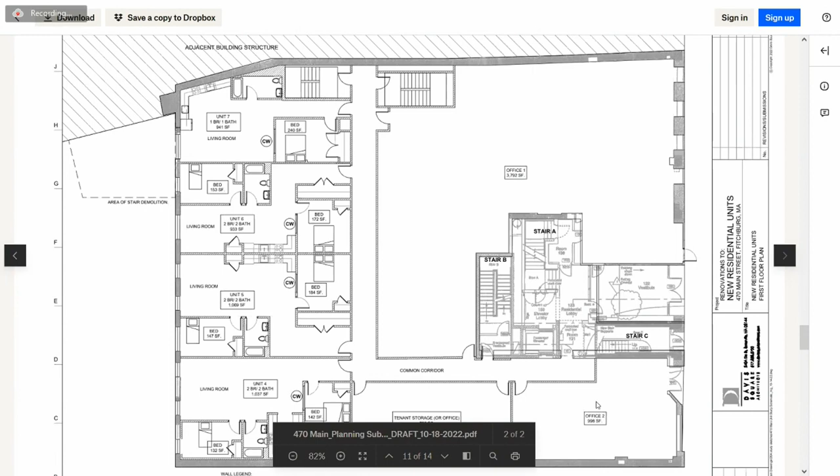That's kind of it in a nutshell. I'm happy to go into more detail on any of this if folks have specific questions.

I recall in the previous development there were certain factors you had to do for preservation of the staircases. Will that impede the project at all, or was that just dependent on financing?

I can answer that one. That staircase was actually the one labeled Stair C. We have no more historic designation there; the time period for all the historic renovations and preservation has expired, but we will not be impacting that Stair C, as far as I know.

How is the parking working out between the units now, for the parking count for the additional units? Because they'll be seeking a waiver for parking potentially with this, so we'll have to evaluate that when you submit the special permit.

We currently have, I believe, a letter still in effect for something like 80 parking spots that we could reserve. I checked: for the 31 units, we have about 25 of those—25 of the tenants have cars and have taken spots in the garage that we pay for. I think you're right, Mark.

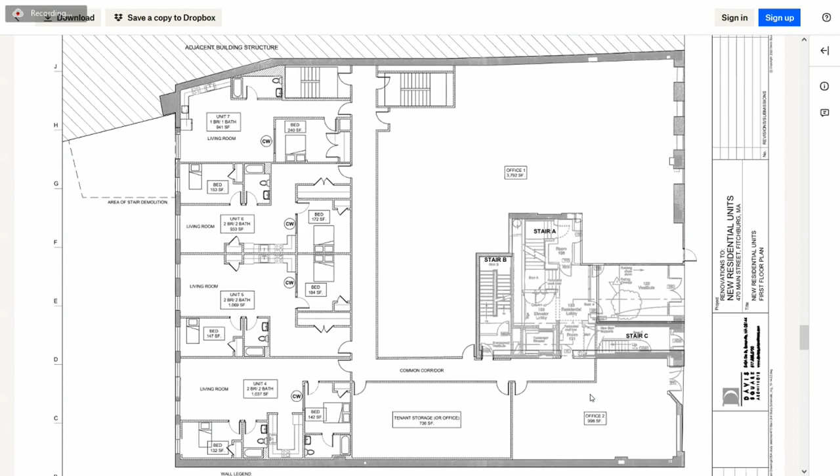I'm looking at a letter that was in the file from 2007. The city is willing to reserve 87 spaces at the parking garage.

So you're actually reserving 87 spaces? I was going to say they're just saying how many we have—so you're reserving basically the 25 that people are currently using? No, that letter said we could have the right to use up to 87 spaces if we needed it. So we pay for the spaces we use, and right now we're using 25 of those spaces.

Okay, so the one thing we should revisit is just to make it match what we do now. That must have been an oversight, because there has to be a long-term lease agreement for all the spaces you need. You don't need that many spaces, first of all—we certainly don't need 80 spaces. But something like what we just did at the other site, which was one per unit, something like that.

You should have those spaces earmarked specifically for your project. The problem with the way it was done before is that letter said yes, they were available—they were available when that letter was done, but if you don't actually have a long-term lease agreement for those spaces, they might not exist tomorrow. So the project needs a long-term lease for all the spaces necessary, which, like I said, does not need to be 80.

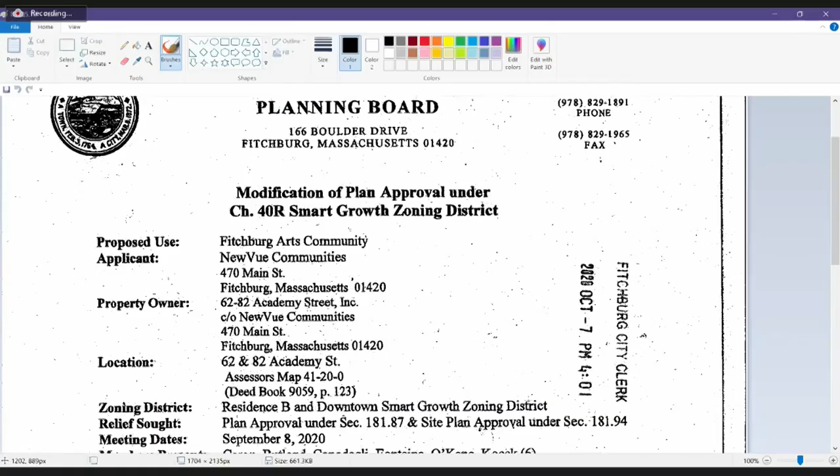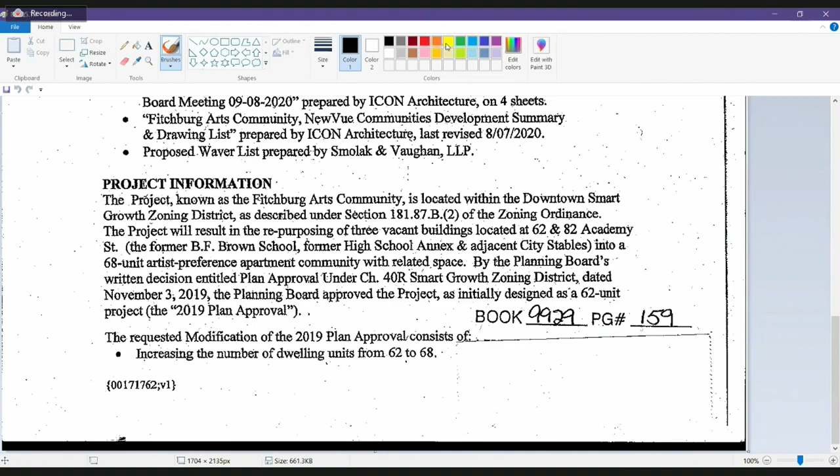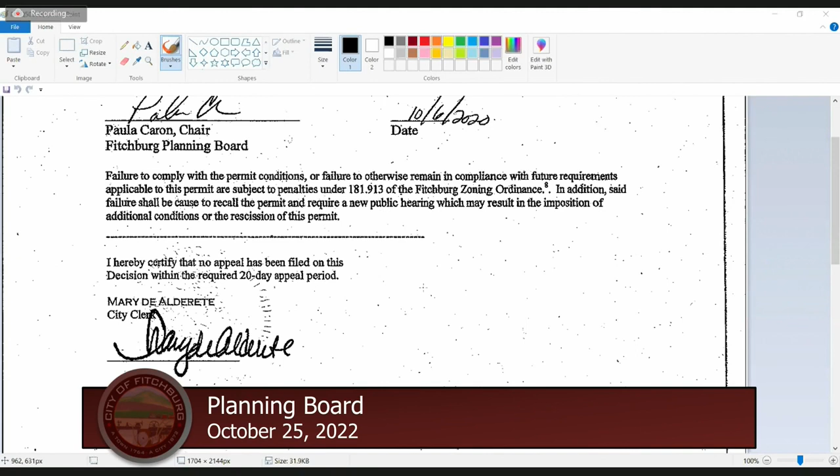You just want the signature date, Mike? Well, the date and clocked in. Because that's the effective date on the upper right. This is 3/30/2021. This is the last page, which has a 20-day appeal, lapsing after 2 years. 10/6/20, and then 20-day appeal. So it's good until October 26, 2022, because she signed it October 6th, then it was 20 days after that.

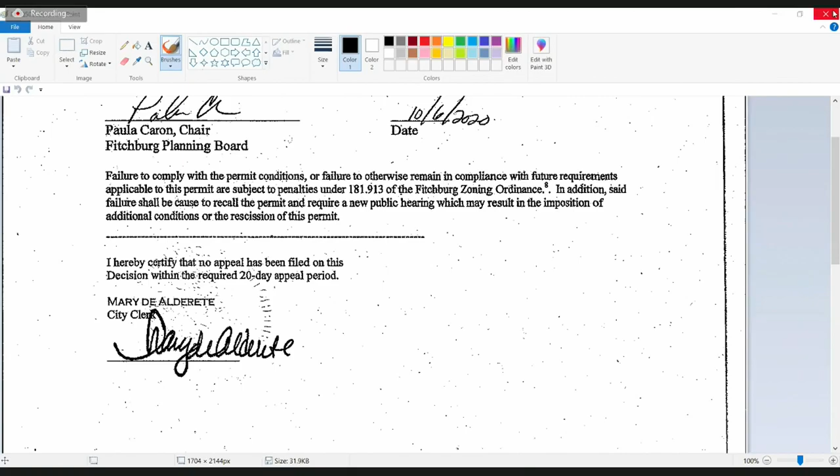No, is it just the day of recording? Not the date of the thing? So March 30th, 21 is the day it was recorded. You see what I'm saying? I do, but there's got to be, during that time, a COVID extension, which extends out beyond, even if we go with the date of the signature, October of 22.

Okay, well guys, just look into it. I suppose we can't really approve it if we don't know when it expires. There's no sense in doing an extension. It's just something you're going to want to keep fresh in your mind about whether you need an approval or an extension. I certainly don't want to go through the whole public hearing and reapproval again. It's just time consuming for any project.

Yep, just let us know if you need an extension request. So we'll just probably perform it as a hearing, as we do with most of the extensions, and we'll get it on the agenda.

Just to be clear, we can't do it tonight because we didn't notice it and do all the proper things that we needed to do, correct? No, we can't do it tonight because we don't know if it's expired or not, or if it's expiring anytime soon. I can't tell based on that document when it expires. So I don't know when it expires.

Right underneath the various extension acts, maybe auto extension, so the chances are good it didn't. Like Mike said, it was recorded March 30th, 2021. I would assume that's probably the date they go off of, the recording date, right Mike? We'll figure it out. Well, it's only a problem if it's October 26th, because that's tomorrow.